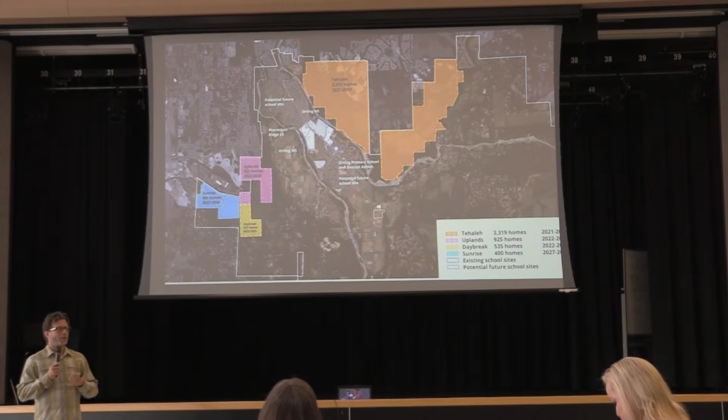I think last time we highlighted a number of the things we've been doing during the spring of 2023. Mostly I think we've highlighted all of these. Anything new on here? I will talk a minute about the new elementary school site here. But we also want to talk a bit about the long-range planning that's happening, connecting with the developers and trying to make sure that we're securing some future school sites. So that work has been ongoing over the last couple months.

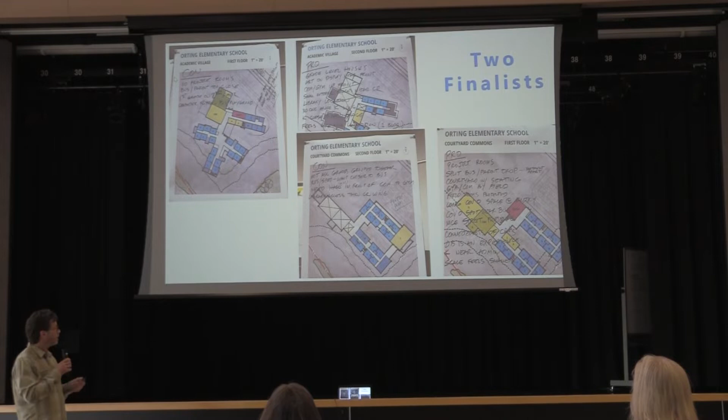As I mentioned, tonight you'll see the 2 finalist options. Prior to this, we talked through prior iterations and other options that dropped away, doing that through a pro and con exercise looking at different things.

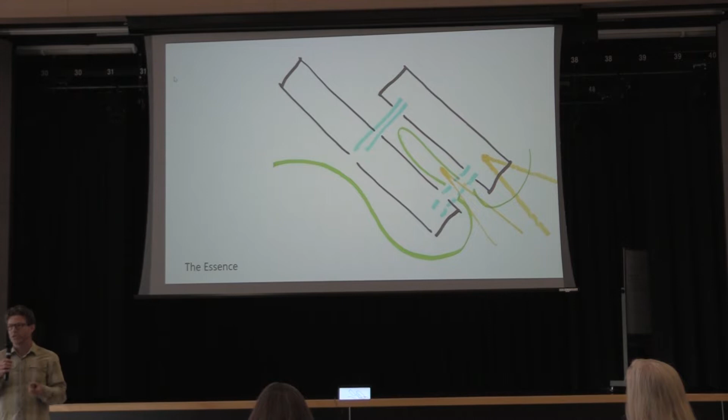So the first option we're going to talk about is what we call 'courtyard commons.' The idea here is to come up with a building design that allows the natural feel of your site to become really integral to the experience and educational opportunities at the school.

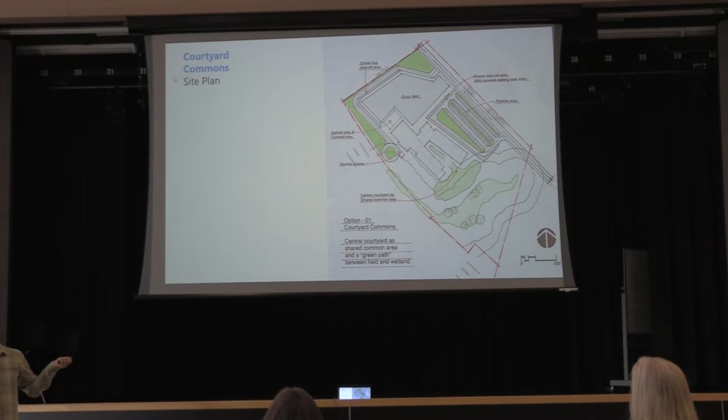That'll become the main access, and Rocky Road can become the secondary access. So the good thing is that gives us a lot of queuing space off the highway, and it also allows us a way to get onto the site without having to make a left-hand turn off the highway, which can be difficult many times a day.

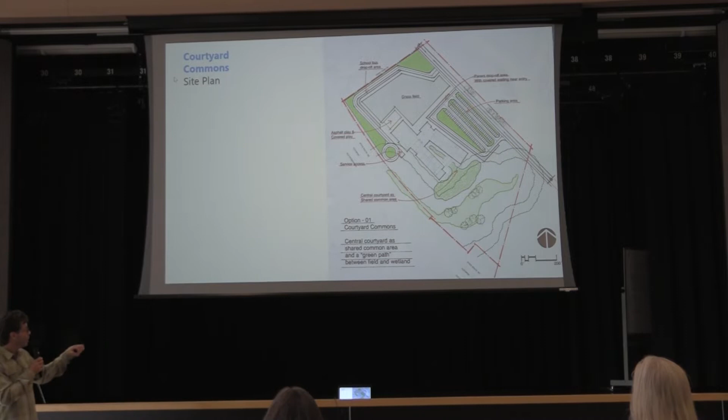So we have a parent drop-off loop, come around, we have the buses that load off the playground area, and then the building in the middle that has this central space in the middle of it.

Again, I'm not going to go through all the details now because we're going to jump into it, so you can later in just a minute.

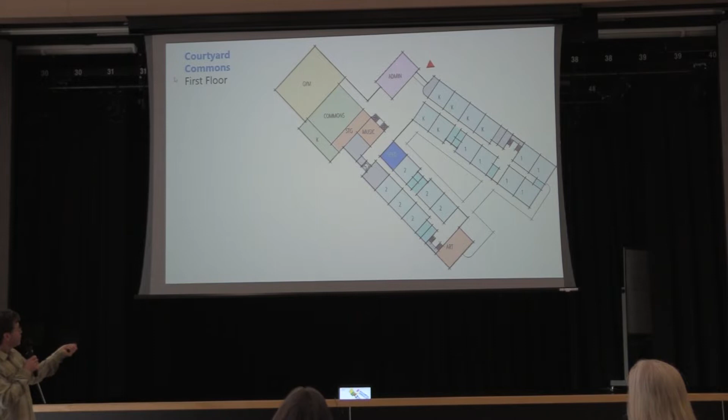You can see here that the red arrow represents the main entry. You have kind of a public zone here that has your administration, cafeteria, commons, gymnasium, and an academic zone with these two wings that have a courtyard in the middle.

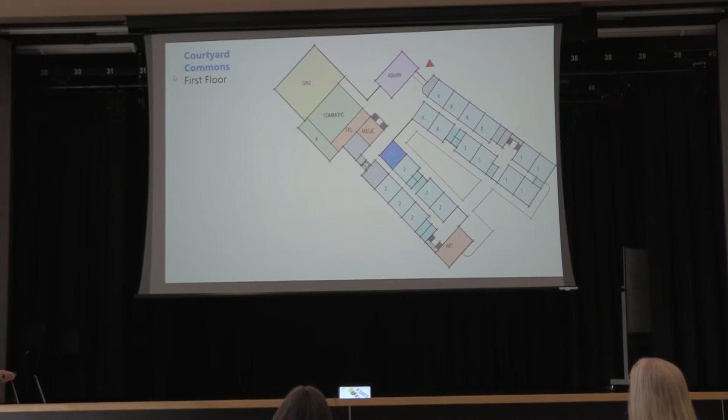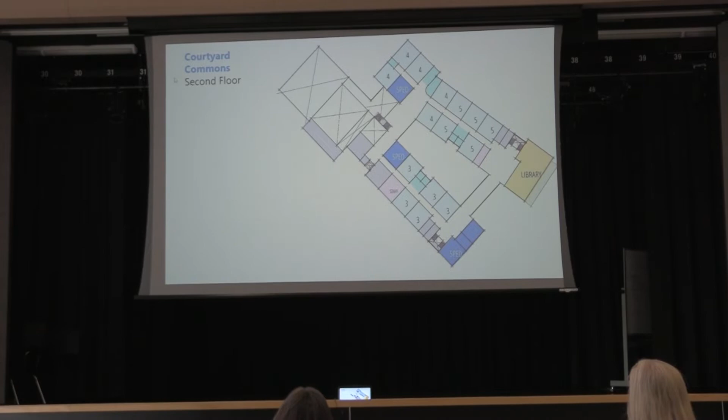You'll notice that one of the wings has two grade levels together, the other one grade level. Similarly, on the second floor, there's two grade levels together, 4th and 5th, with another grade level on the opposite wing.

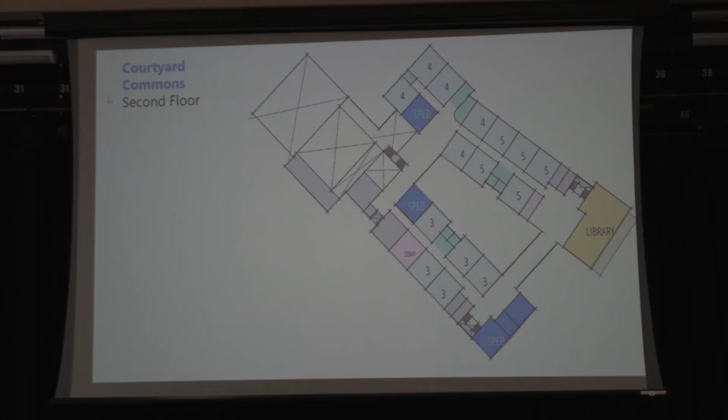One of the key features is going to be really celebrating the library space within the school. You can see it's at the end of the wing. It's going to have that prime view out across the wetlands and to the mountain. So it's intended to be this place that is really celebrated within the school.

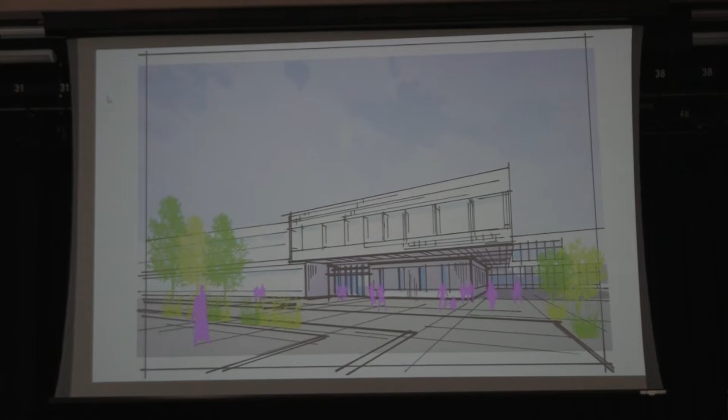These are just a couple quick vignettes intended to capture a little bit of the character of how it might feel as you enter, not to capture the exact design. So as you see here, there's a kind of overhang at the front entry. You have some nice covered area, good view. You can see through here to the cafeteria, gymnasium for after-hours use.

And then inside you can get a sense here of how this interior space could really be quite dynamic. You have a second floor hallway space that connects you to that library and that view to the mountain. From inside you can get a sense of how this whole space is really well connected.

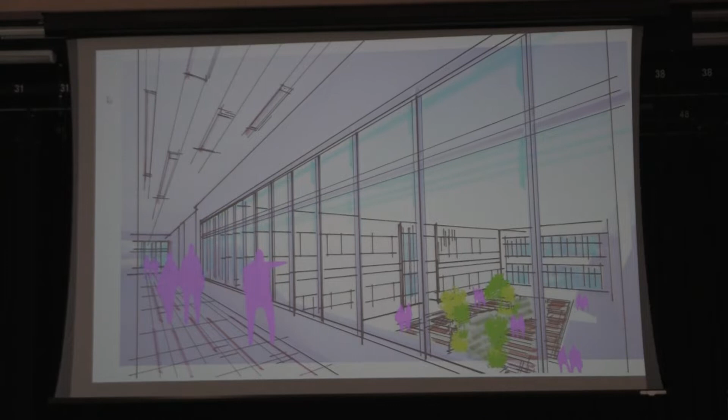I'm going to move to the next idea, and I know I'm moving super fast, but that's to just allow us the maximum amount of time to be together.

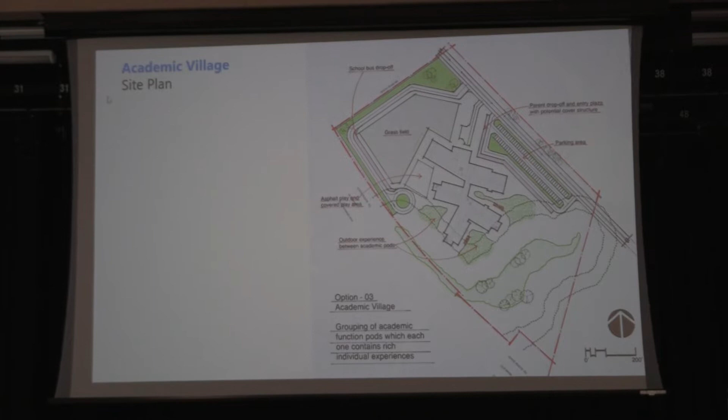The overall arrangement on the site is actually pretty similar, where you have a parent drop-off loop here, the building kind of in the middle, and the playground sort of in the north area towards Rocky Road, with the buses loading and unloading along the playground, making good separation of the parents and the bus drop-off.

As you start to look at the building, you can start to see how this shape allows for main entry, administration area, cafeteria, gymnasium space right up front, easy access for the public when it's not school hours, and then a series of grade level classroom wings here that have this little finger-like expression into the landscape.

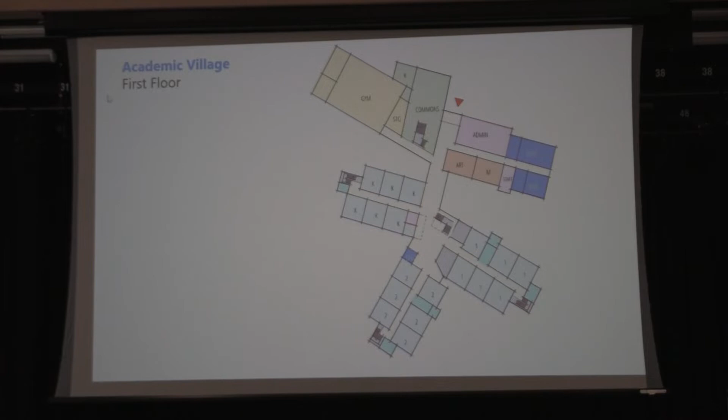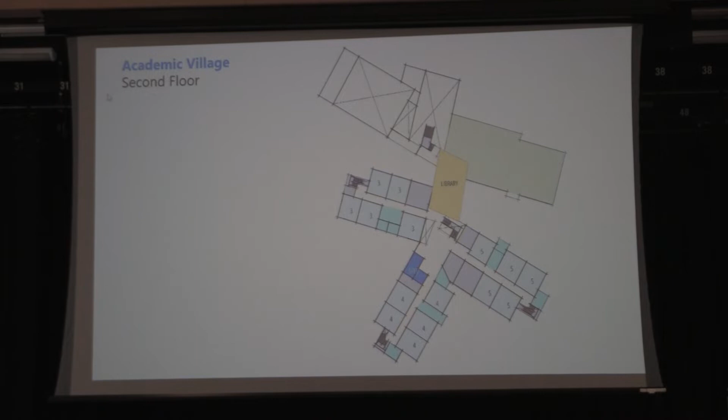And then up at the top, linking all of those classroom wings, is the library, so that each of those classroom communities can easily get to that, and again, the library does end up having that commanding view, and it becomes a really special space within the school.

You get a little bit of a sense here of, as you're coming from the parent drop-off loop, coming into the building, you have kind of this large overhang welcoming you into the building, and some nice view into that common space.

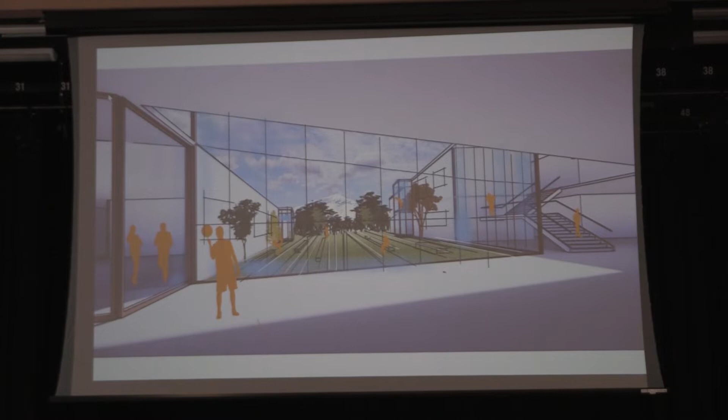And of course, we want to always be able to highlight that experience of nature and the mountain inside the building, and looking to be able to do that both at larger scales and smaller scales.

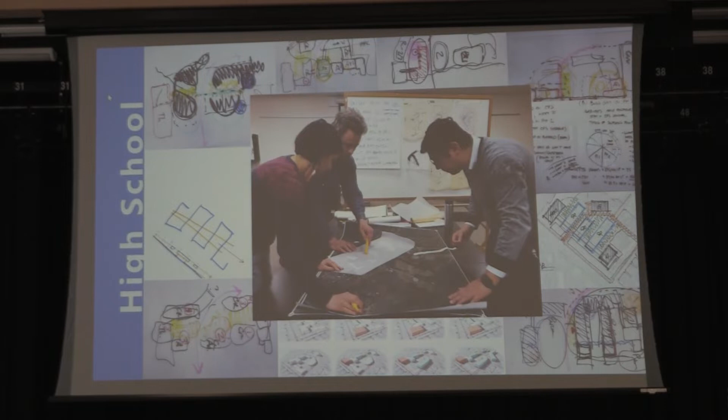So with that, we need to be really thoughtful about getting us to our end result, where you have a comprehensive, rebuilt Orting High School.

Obviously, you guys have helped us identify that option A, adding a 300 student capacity addition of classrooms, CTE, gym, and wrestling, is really the right approach for the first phase at Orting High School because it addresses a lot of different needs at once. So we've been moving forward with these different options based on that.

And then there's a couple of buildings that, as we were studying things, we identified as likely candidates for demolition. One is what we already all know, which is the old wrestling gym. But the other one is the 8 classroom building in the middle that was originally intended for elementary school. It's really a building that probably in the long run just isn't worth trying to renovate, so that's a good candidate for demolition.

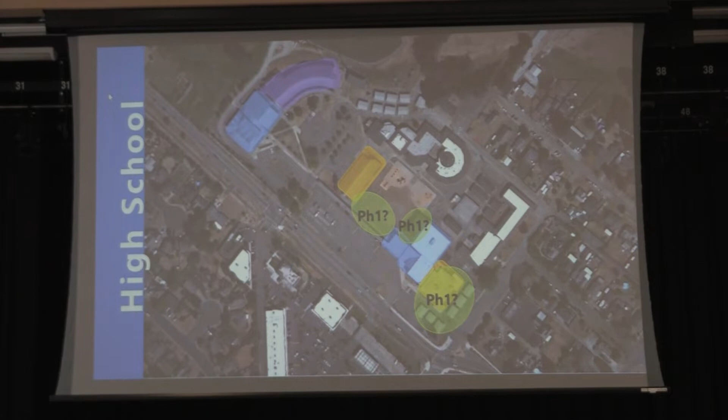And then of course, where can you put your first phase of construction? Where there's no building now is really the answer for the most part, except maybe the wrestling gym. This was really helpful to see the high school as a bit more of a blank slate, where you just see these existing pieces we know we're going to keep, and then start to think how we can build over time something new and really special for the high school.

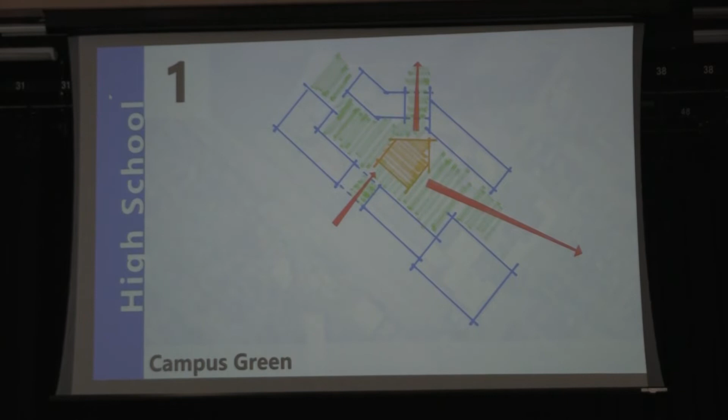So with that, we came up with two different ideas. One is called Campus Green. This idea is really to create an environment inside these new buildings that has a feel of a college campus green, where you're walking between the buildings, but it's all within a secured area, and you have a really special central building here in orange. That might be the new cafeteria or some special space like that, so the student experience is really enhanced, and we're getting all of the new program that we need.

So the first phase would be, of course, the new athletic facilities here—gym, wrestling area, locker rooms—and some new academic space, grouped along the corner.

As we come to the next phase, you start to see the next chunk come in. Maybe this is the big cafeteria. Maybe we have a new administration area coming in, more classrooms, starting to create a new center to the campus over here. Then we come in with a third piece which allows us to connect with the existing buildings and create a nice front along the highway. At the end, we can complete this and create more of a completed campus edge.

And then just quickly looking at a couple different ways of trying to address circulation and parking. This is not worked out right now, so there's still a lot more thinking to be done to really resolve this, because that's a key challenge that we have at the high school.

We found it helpful to start to just extrude these boxes into 3 dimensions, so you can start to get a sense of how the new pieces start to play in with the old. I have 3 different views for each phase.

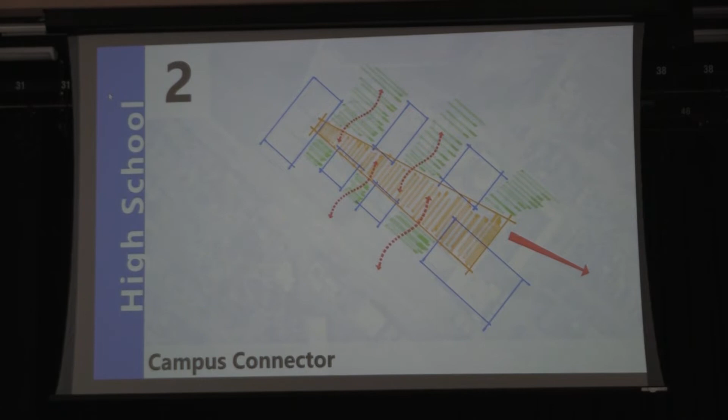Okay, second option we're calling the campus connector. So this is a little bit different. This is trying to say, is there a way to connect all these different buildings with a single building so that you can basically walk inside eventually, from one building to the next to the next.

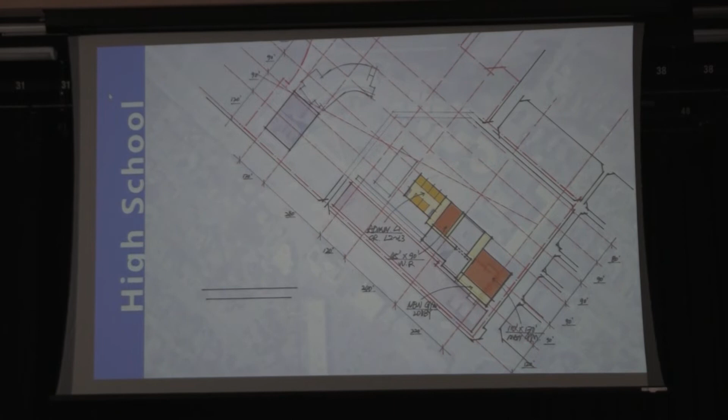And it does that in a way where, again, the first phase is very, very similar. And this one, we think it very well might be necessary to move the administration and just reorient the entry here, but that's still open for discussion.

And then you can start to see how we continue to build onto that with our new addition. You can see this kind of angled piece is really starting to suggest that some of those common larger spaces, like a new cafeteria, are in that space that becomes part of the connector. Maybe some of the other special programs of the school are also in that connector to help draw you along as you move through the school.

As you move into the next phase, you can start to see how we continue to build towards where we are sitting today. And then finally, we have the potential to even connect in if we want.

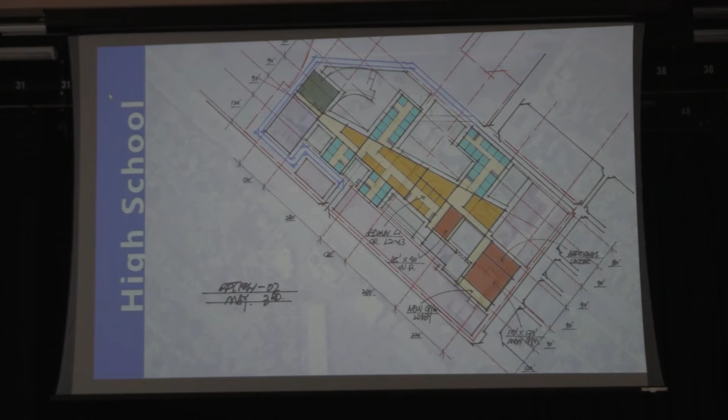You'll notice in these we're showing a new building in green, which could be a new theater on top of this curving building, kind of a placeholder for now until we do our final assessment of that curving building. And again, this is looking at that circulation.

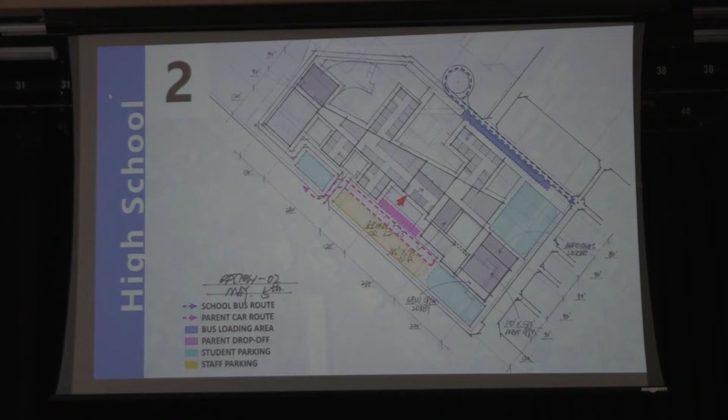This is exploring the idea that maybe we create a bus loop along the backside to be able to get buses a little bit farther off the highway and more separated from the automobile traffic. Still more study to be done there.